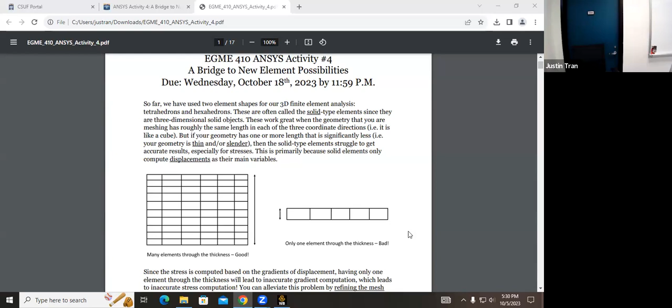The idea behind the activity today is to give us practice with shell and beam elements. In the last two lectures we've been talking about this special element type - shells and beams - and how they can help us out when our geometries are in a challenging position. Remember what we talked about is that, generally speaking, when you're making a mesh, you want to have multiple elements through the thickness.

So this is what's going to give us the best result. But if you have a thin, slender geometry, sometimes it's really hard to get that, and you end up with a mesh that looks like this. We have only a single layer of elements.

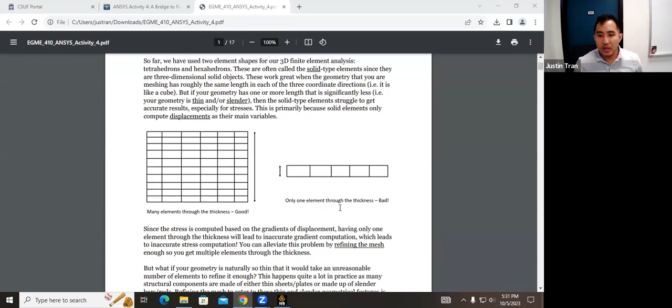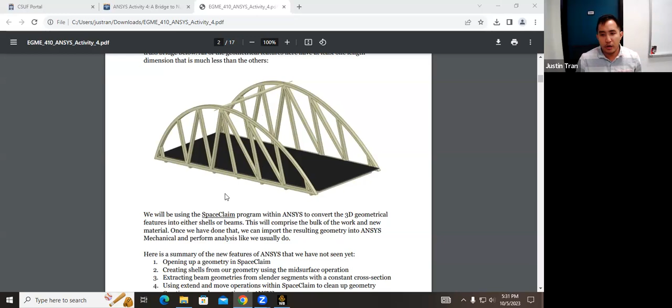Okay. And so the geometry that we're going to be working with today is a bridge. If you look at this bridge, there are a lot of thin and slender geometries. So if you look at both sides of the bridge, we can convert them to shells. Same thing with the road. And we have all the beams, so we have the beam up top here, and then it's a little bit hard to see, but we have beams on the bottom. We'll convert all of these to shells and beams, and then we're going to do our analysis.

Okay, so if you haven't already, go ahead and open up ANSYS Mechanical, or just ANSYS Workbench, and then download the CAD file from the website. There's only one CAD file this week, just the bridges one. So there's no extra activity at the end of this one, but we are going to spend probably the entire time today working.

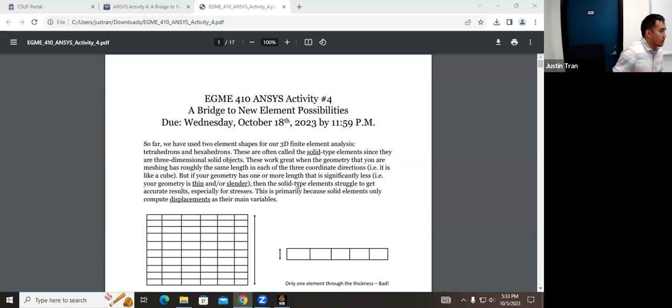All right, so just like before, let's go ahead and open up Static Structural, and let's import our geometry. We're not going to do anything with the material properties this time, so we're going to leave everything as structural steel. We're going to focus purely on the geometry. So let's go ahead and browse and import the geometry that I had on there. It should be bridges.iges.

And then we're going to open up this geometry in a program called SpaceClaim. If you're working with the 2023 version of ANSYS right now, you'll see that there's three different CAD softwares within ANSYS. I don't know why they have three, it used to only be two. I actually haven't had a chance to check out Discovery, which is their newest one. So we're going to do this activity in SpaceClaim, which was their newest one before Discovery.

Okay. So you're going to right click on geometry, and you're going to edit this geometry in SpaceClaim. Make sure you pick SpaceClaim. Don't pick Discovery, don't pick DesignModeler. All the instructions today are going to be relevant only in SpaceClaim. It'll take a couple minutes, so make sure you guys are starting that process.

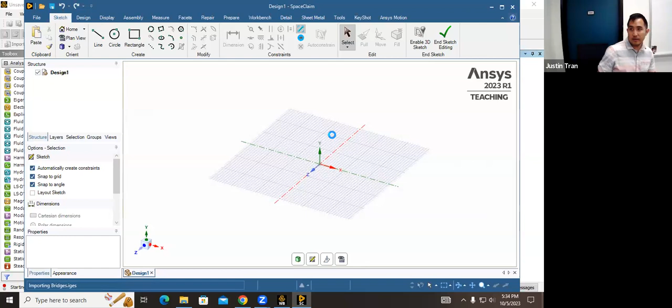It might take a minute or two, depending on the power of your computer, but once you load it into SpaceClaim, it should look like this. You should see the bridge, the beams, the road and everything. I'll give everyone an extra minute to load it up, because for the next few steps it's going to be really important that you watch what I'm doing and repeat it as closely as possible, because it's going to be a lot of steps. We're going to be going through different menus, clicking on other things, and once we convert something to a shell or beam, it's a little bit hard to go back. So I want to make sure that we're all staying on pace.

I'm going to move my bar down here. Okay. All right, so is everyone able to open the bridge CAD file in SpaceClaim? Anyone still loading up? Okay. All right. I'll give you guys 30 seconds.

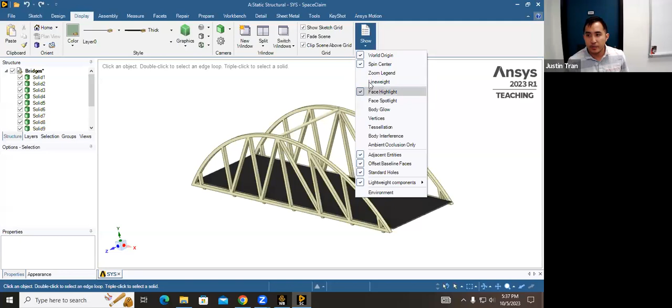Okay, so was everyone able to open up the bridge in SpaceClaim? Oh, good. Okay, so what we're going to do in SpaceClaim here is we're going to basically modify this geometry to become shells and beams. So we're going to do all that conversion in here, and then by the time we get into ANSYS Mechanical, we're just going to mesh it straight away.

All right, so the first thing we're going to do, and this is going to be a theme throughout most of today, is we need to fix the geometry, right? If you remember what I mentioned at the end of class on Tuesday, once you start converting your geometry to shells and beams, it creates a lot of gaps. It creates a lot of parts that don't connect as they used to once you convert things to shells. So we're going to spend the majority of our time here actually correcting those.

And so the first thing we're going to do is check for any gaps or inconsistencies right off the bat. You're going to come up to this top tab here and click on Repair. The Repair tab is there to repair the geometry. ANSYS has a lot of automatic tools here to automatically detect some problem areas in the geometry.

So the first thing we're going to do is go to this first tool here called Stitch. So we're going to click on Stitch. What the Stitch tool will do is, if there are two parts of the geometry that are not quite matching together, and they're 3D models, it'll stitch them together. There's nothing wrong with this model, so there's nothing to stitch. But I did want to make you aware of that, if you were going to use this.

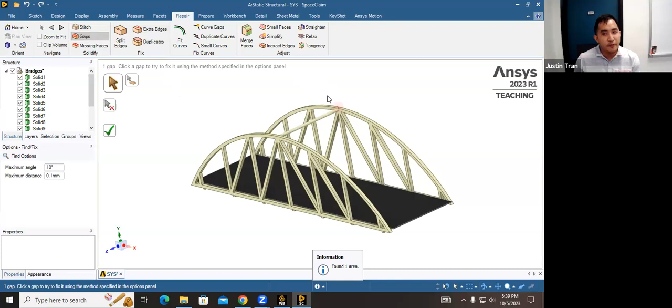Before you start converting anything to shells and beams, you should always try to stitch your model. If you click on Stitch, you should see at the bottom that there's a little bubble that comes up. The other tool that we're going to use here is called the Gaps tool. If you read the tooltip for Gaps, it says it's going to detect and fix any gaps in the surface. And you're going to see it did find one gap here, a small gap in between these parts.

But we're actually not going to fix it here. Normally, if you did have something that can be fixed in this model, either with the Stitch tool or the Gaps tool, this green check mark here will highlight, and you can click it, and that'll automatically fix the part. This one in particular is something different. We'll deal with this later, but that shows you an example of what ANSYS can do automatically. So you shouldn't be stitching anything, there are no gaps to fix here, but I'm just showing you what to do in general.

All right, so now that we're confident that our 3D model is at least good to go, let's start converting this. The next tab we're going to go to is the Prepare tab, the one right to the right of Repair. The first thing we're going to do is convert our thin segments into shells. We have three shell bodies here: the two sides of the bridge, and the road. So we're going to convert all of these into shells.

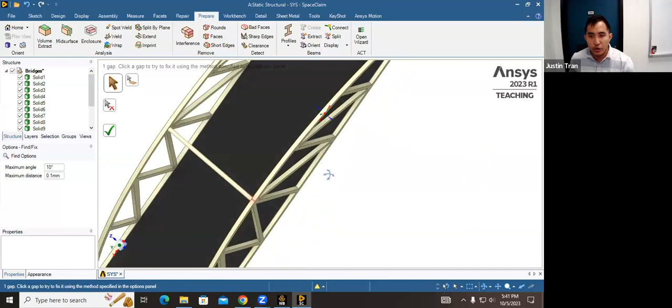If you look at the thickness, I think it's most clear from the road. You can see the road is very, very thin compared to how long and how wide it is, so that's a textbook example of a shell. The same can be said about the sides of the bridge. If you compare the length and height of the side of the bridge, they're much greater than its thickness. So these are perfect surfaces to convert to shells. The operation we're going to use is the Mid-Surface operation, which is what we talked about today. So let's go ahead and click on Mid-Surface here.

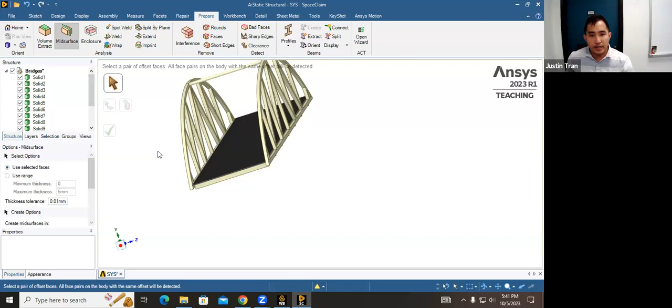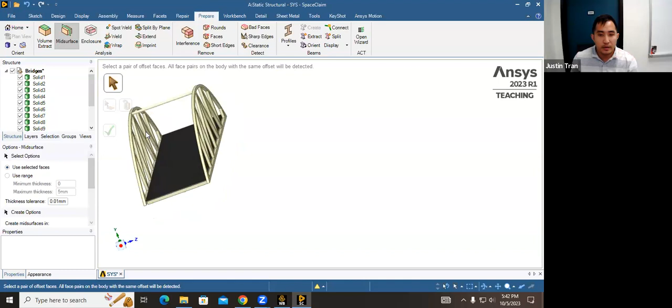Right. So the next step here is going to be to select two parallel surfaces. And so remember, the way the mid-surface works is that you pick two surfaces here that are parallel to each other. So I'm going to click maybe the inside of this bridge here, and the outside as well. And so the two sides of your bridge should highlight. So one should be green, and the other should be blue. Okay. And so that basically says that ANSYS has found two viable surfaces.

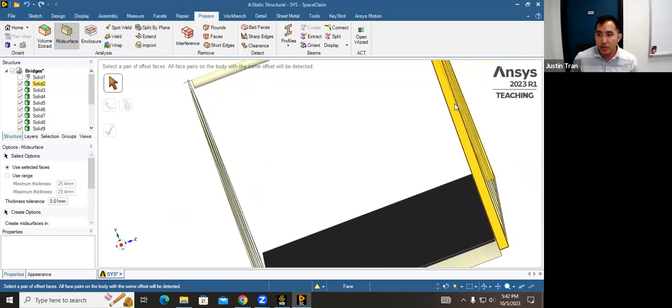Right? And so to create the mid surface, all you have to do is click on this green check mark. Okay. And so by doing so, it's going to create a mid surface in between the two. Right? And so I'm going to try to hold this on as much as possible. You can see highlighted or kind of transparent now is the old surface. And then the gray thing in the middle, that's the mid surface. And so if you click on it, you can see that we've basically turned this three-dimensional part of the structure into just a thin shell, which has infinitesimal thickness.

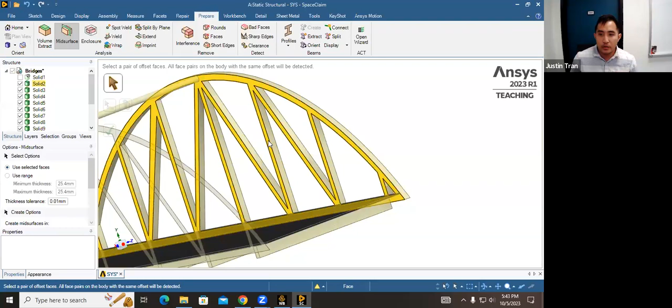All right, so let's go ahead and repeat that for the other side of the bridge. So make sure your mid surface tool is highlighted. So go ahead and click on the other side of the bridge. Once again, we have green on one side, blue on the other. Hit the green check mark. And so we've converted that side of the bridge to a shell.

And then finally, we're going to do the same for the road. So the road, we're going to click on the road, the bottom side of the road, click on the green check mark. For the road, it's a little bit hard to tell because the road was already so thin, but you can see from here that it did turn it into a shell. All right, so by the end of this, you should have 3 shell surfaces, so you should have 1 shell for each side of the bridge, and then 1 for the road. Okay.

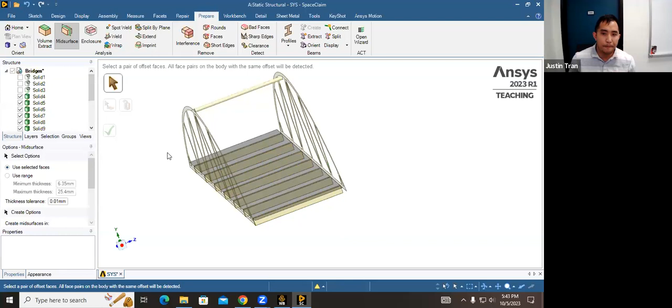All right, any questions on this? Everyone able to use the mid-surface operation, okay? Awesome, cool. All right, so that's mid-surfacing, and that's all there is to it. So your geometry has those parallel surfaces.

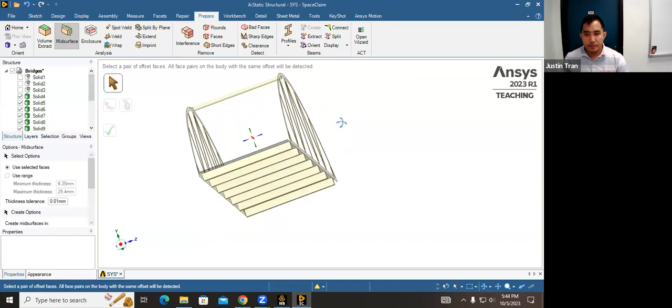All right, next we have the beams. Okay, and so if you look at each of these beams here, they're all fairly slender objects. So they all have one dimension, right? In this case, it would be the length of these beams, that's much greater than the height or the width of those beams. So these are perfect candidates for the beam element.

So same thing. To create a beam element, we're again going to be within the prepare tab here. And then the button that we're going to pick is on the right here called extract. Okay. And so if you hover over the extract button there, you can see the tooltip. And so you can see that it's going to extract a beam from a solid. As long as that solid has a constant cross section, then we can extract the beam. Let's go ahead and click on this tool.

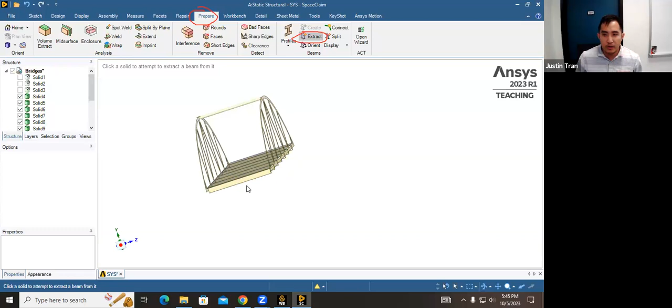Right. And after you click on the tool, you can then click on any of these beams here. Be careful, don't click the road. And so after you click on a beam, you can see that it disappears and it's replaced by a line. Let me go ahead and do that for all the other beams. Just going to go one by one, click on each beam. They should all be converted. Right, so pretty easy, right? And so we're good. So we have all shells and beams, right?

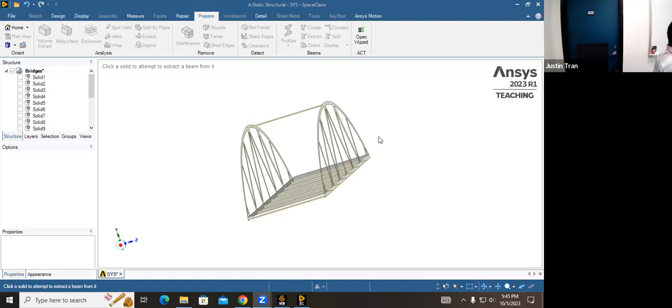And so I would love to say that's all there is to it, but there's more. But was everyone able to convert their geometry? So everyone has shells and beams now with geometry. Okay. All right, everyone on Zoom doing okay?

No, I feel like I kind of neglect the Zoom. You guys are doing okay.

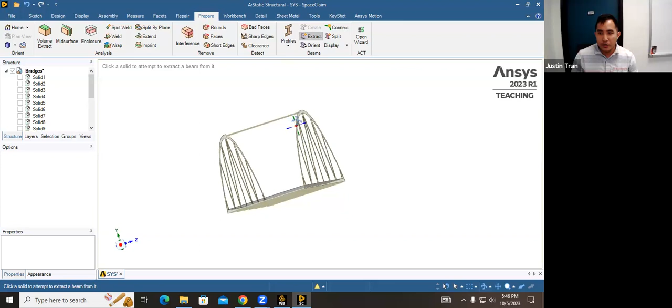All right, so now we have a geometry with all shells and beams. So the next step here is going to be to make sure that all the parts are connected. And so if you zoom in, let's zoom in on this top beam at first. You can see here we have an issue where this line right here, which we used to replace the top beam, there's a gap, right? There's a gap in between where the beam should end and the side of the bridge, right? So that beam isn't structurally attached to the side of the bridge.

So we need to basically repair this geometry in order for that to happen. Okay. And so the tool that we're going to use for this is an extend tool first. Because what we want to do is we basically want to extend these beams until they hit the bridge.

Question in the chat, sorry. Oh, doing good. All right.

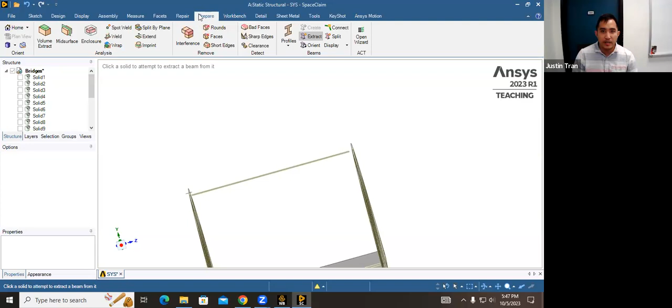Okay, and so the tool that we're going to use is also in this prepare tab here. We're going to use this button right here called extend. So if you highlight over the extend, you can see what it will do: it will extend surface edges or sketches to line up with the intersecting bodies. This is kind of the tool that ANSYS has developed to make sure that after you create shells and beams that everything connects. So let's go ahead and click on this.

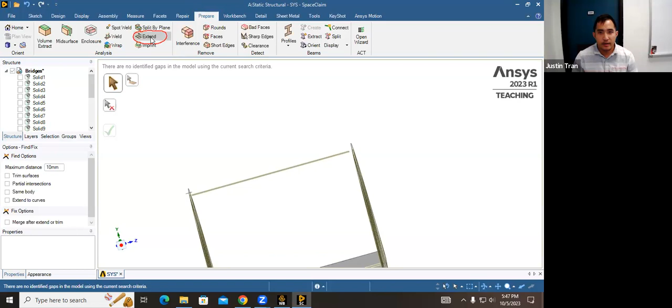At first, it's going to tell you that it's not going to see anything here. So go ahead and click on extend. It's going to say no areas were found, which is not true. And the reason it's not seeing any areas is because it's only checking for a maximum distance of 10 millimeters. So if you look on the options on the left, you can modify how far you want the extend to check. This bridge is bigger than 10 millimeters, so we need to increase this. Instead of 10 millimeters, let's change this to 50.

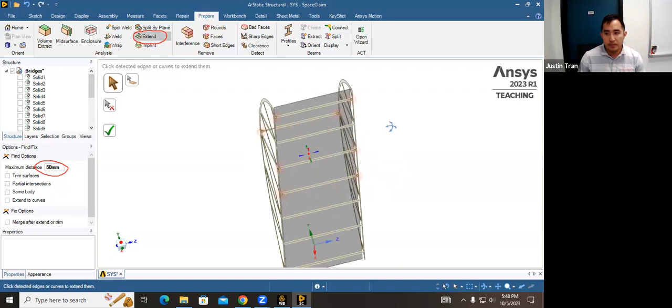Okay. You can see after we've changed that to 50 millimeters, ANSYS has found certain areas here that it can extend. It's highlighted all of those with the red circle there. So to fix it, you can go ahead and click the green check mark. Let me show you what happens when you do that. Here. You can see from here that there's a gap.

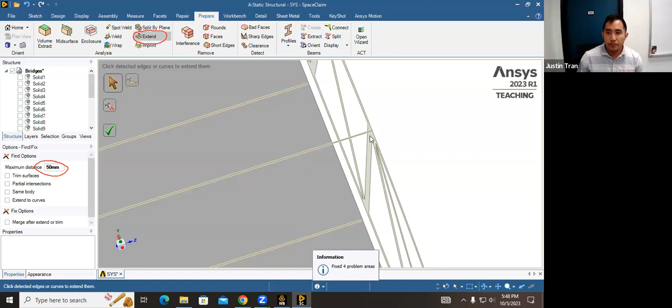After I hit the green check mark, the beam gets extended all the way to the bridge. And it only does that for one side, so you're going to have to hit the green check mark again. That extends for the other side as well. And that'll actually fix quite a few of the beams at the bottom too. But it doesn't fix all of them.

Any questions on this so far? Everyone's able to extend? So many areas where it's supposed to solve. It was supposed to solve for 8, so it should be 2 areas on the beam up top and 3 per beam at the bottom. Why do I got 6? Okay, it's okay. So not all the beams are going to connect, and the other ones we're going to have to modify. Might be a little bit different for everyone, just because of the 2023 version. It's not supposed to fix all the beams, so there should still be some beams that are disconnected. All right, any other questions on this so far?

Okay. So let me do this just to make it a little bit easier to see. Let me go ahead and remove the road. I'm just hiding the road for now. If you have this structures tab here on the left, you can click on this check just to hide it. We're going to bring it back, don't worry. This is just to make it a little bit easier for us. So let me do this.

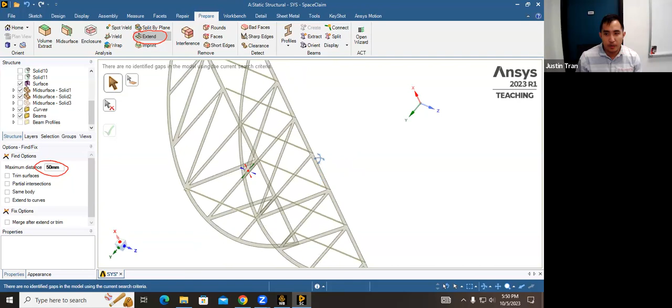Okay. So when viewed from the top here, this is our bridge. What I've done is I've clicked on the y-axis here to view it from the top. And I did this just so I can illustrate that not all the beams are connected. So we look at this beam on the bottom right here. This one was able to connect. But when we go to the next beam here, you can see that there's still a gap. And you might be thinking, why is that? Why isn't this beam connected to the bridge?

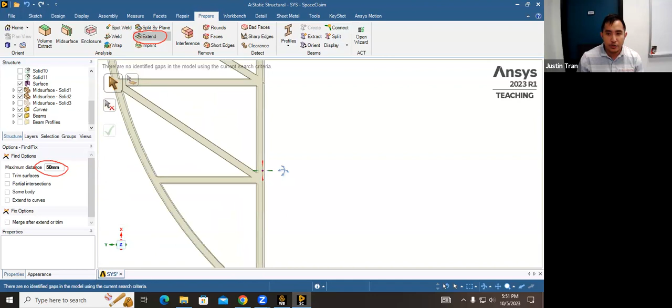Okay. And so what I've done is I've changed the view so that we're looking down the z-axis here. And I've zoomed in on this beam here that's connected. And you can see here that it's slightly offset. Okay, so let me rotate it around just so you can see. So what I'm looking at is this beam right here is the one that's not connected to the bridge that it should be. And when I rotate around, you can see that there is a small gap.

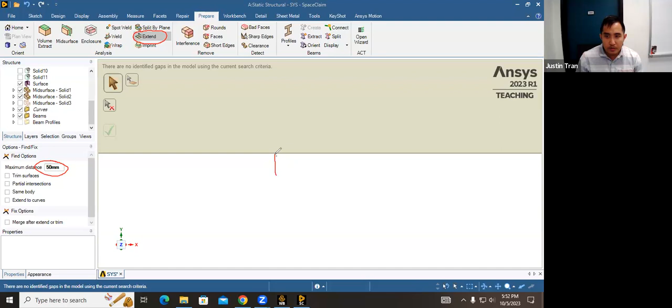Okay. And the reason for this is that when we converted this curve into a beam, the center of that beam actually wasn't fully aligned with the bridge. If we convert it to a beam, we can see that the beam is actually below the bridge. And so we need to fix this. So we basically need to move this beam upwards a little bit, just enough so that it intersects with the bottom of the bridge. And then we can use the extend tool to extend it to intersect.

Okay, and so to do that, this is going to take a few different steps. Because first of all, we need to know exactly how much we need to move up, and then we actually need to move it. Okay, and so to see how much we need to move the beam up, we're going to use this tool called measure. Go to the top of the screen, we click on the measure tool here. And you're going to click on measure right here. Okay, so you can see that the measure has an image of a caliper.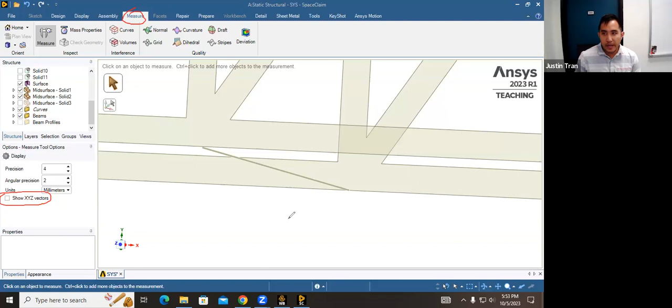All right, and so before we actually measure, you want to make sure that you select this option here for show XYZ vectors. Because we are basically going to be moving this beam up in the Y direction. You need to know how far off. So the way to use this measuring tool is we're going to use control click. So we're going to click on this beam. Right, so you click on the beam just by itself, it gives you the length of the beam.

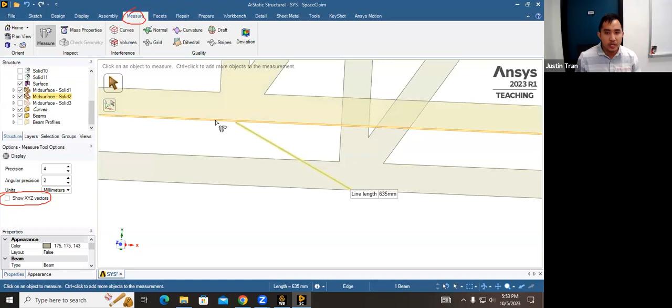Then you're going to hold control on your keyboard. Then you're going to click on the bottom edge of the bridge. You have to be careful here. Make sure you click the bottom edge. You don't want to click the surface. And so what you should see with the XYZ vectors is that, when you measure the beam relative to the bottom of the bridge, there is an offset of minus 0.4127 millimeters. So we're very, very close. We just need to move it up about 0.4

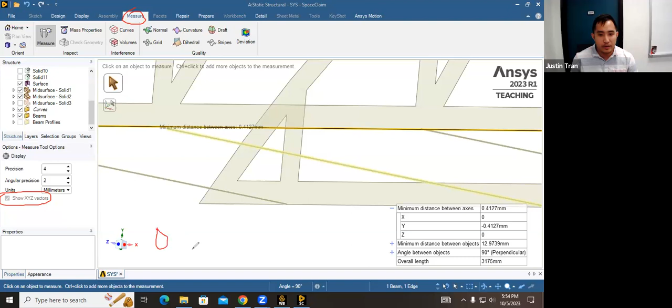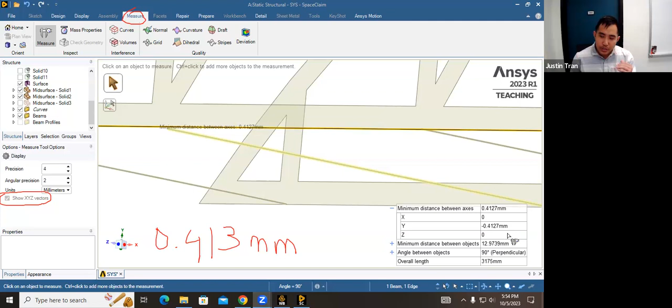413. Let me go ahead and write that down. And you don't have to use your screen. But I don't, and so I write it here. 413. And so now we know that this beam, we have to move it upwards 0.413. It just has to be slightly bigger than this gap. We just need to move it up just enough to intersect with the bridge.

Okay, so we're done with the measure tools. We don't need that. Let me go ahead and clear this. I cleared my thing. Okay, it's okay, I remember. And so the way that we're going to move the beam upwards, we're going to go to this next tab called Design. From the Design tab, we're going to be able to move different parts of the model around. And so the tool that we're going to use is this one right here.

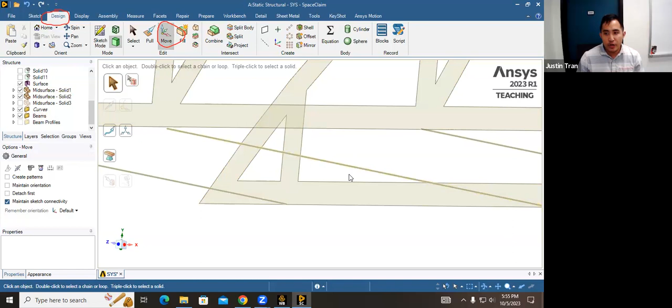All right, so go ahead and click on the Move tool. And after you click on the Move tool, you're going to click on the beam that you want to move up. We're going to go ahead and click that beam. And then after you click that beam, there should be a coordinate axis that shows up here. And so you want to drag it upwards. And so for me, it's going to be the blue arrow. For you, it might be a different color.

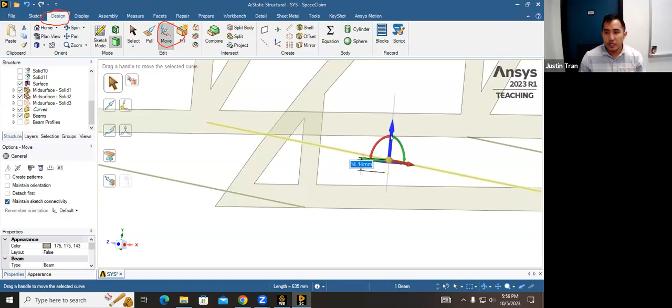Okay. So when I click on the blue arrow, I'm going to start moving it upwards. And you can see as I move it upwards, there's a box that shows up on the side that tells you how much you're going to move it up. And so the way to use this is you click and drag the arrow until the box shows up. And then once the box shows up, you can input the value.

Make sure you're moving up the whole beam. Don't click on the side of the beam, make sure you click on the entire body of the beam so the entire beam comes up.

And after you do that, the beam should now be properly aligned with the bottom of the bridge. Let's go back to the Prepare tab.

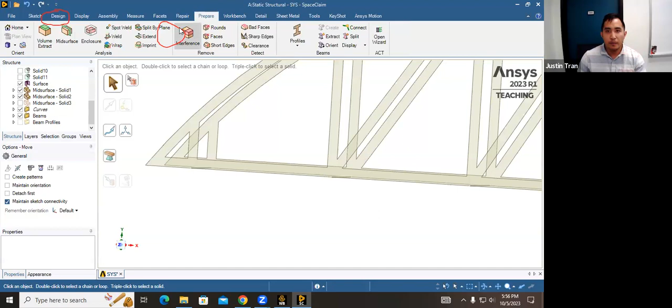We're going to click on the Extend tool. After you click on the Extend tool, you should see that the two ends of that beam we just moved should now be able to be extended into the bridge. So click on the green check mark. And now that beam is good to go.

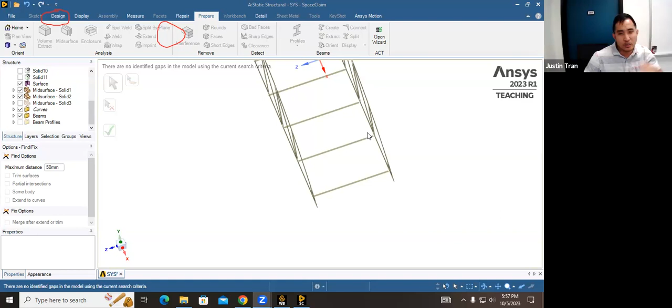I know people are having this question, but every beam that's off here is actually off by a different amount, so it kind of makes it a little bit obnoxious. You're going to have to do the measurement tool for every single beam, but I think it's good practice. So all the beams are slightly off by a different amount, and you're gonna have to measure each and every one, but it's okay.

I'll give you guys maybe 10-15 minutes to work on this, just because it is a little bit intensive. If you're having issues with it, let me know, and I'll come around.

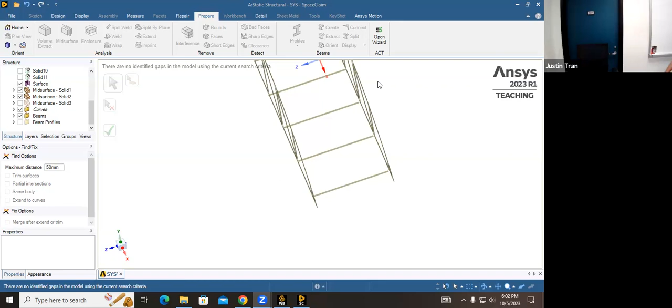So people, how are you guys doing? Doing okay?

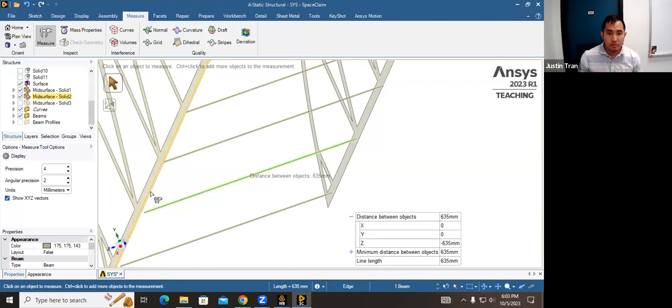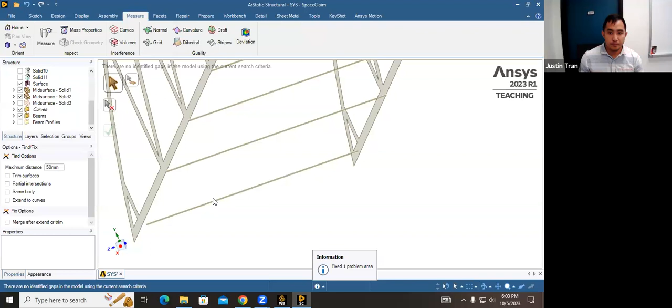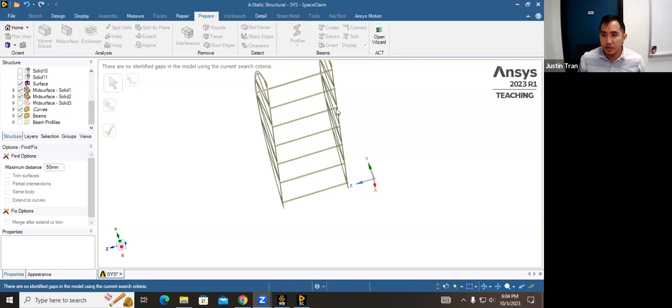Yes, you want to move the beam just slightly up, so that you're not making it touch the bottom. Go back to design. You don't want to move it up too much because we want to respect the original geometry.

You might have accidentally moved one side, so when you move, you want to make sure that you're selecting this. It could have been another step, you moved one.

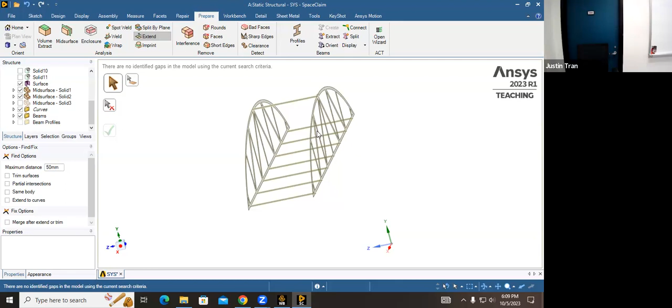I'll give you guys maybe another 10 minutes to work on this, but if you're done with the beams, let's do the same thing with the road. You can see the road here is kind of floating up a little bit, so let's move it downward so that it's sitting on top of the beams, okay? Just like we did with the beams, we're gonna measure where the road is relative to the bottom of the bridge.

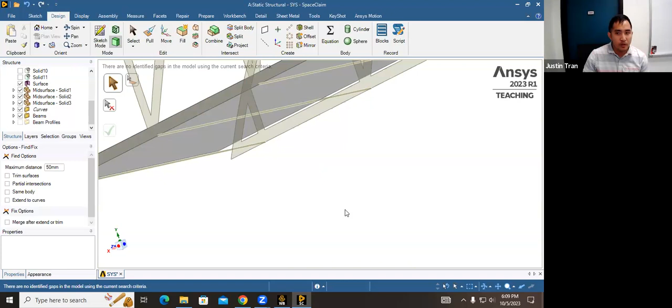One important thing people are experiencing right now: when you click on the move tool, you want to make sure you only select the body that you want to move. Some people are also selecting the bottom of the bridge, or maybe just clicking on one side of the beam, so you want to make sure you're selecting the whole object, and only the whole object that you want.

Okay, so I'm going to click on the road here. Let's go ahead and move it downwards, by 28.13 millimeters. And so it should be sitting right on top of the beams.

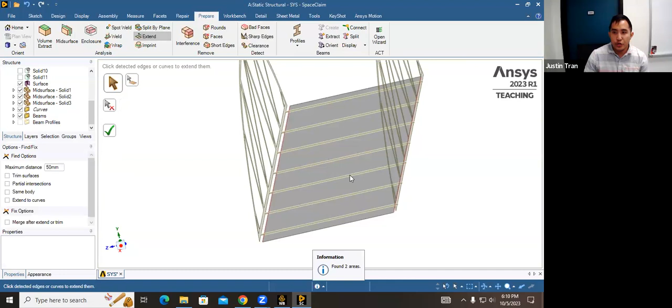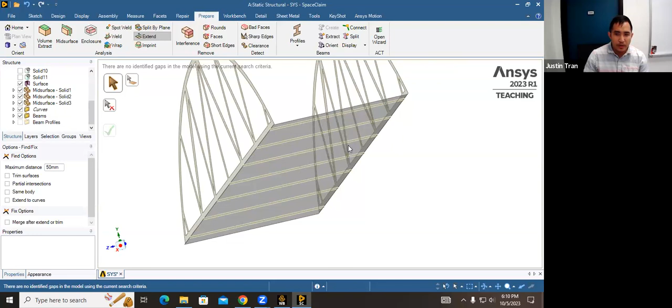Once we click on the extend tool, you should be able to extend the sides of the road as well. In the end, you should have a model like this: all the beams connecting to the bridge, and the road connected to the side of the bridge, sitting right on top of all the beams. You should have this by the time you leave SpaceClaim, but I'll give everyone about 10, 15 more minutes to do this part.

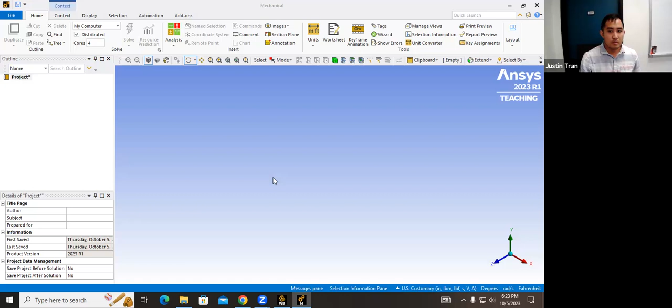Okay, all right, so after you load into mechanical, it should look like this. That's in shell and beam mode.

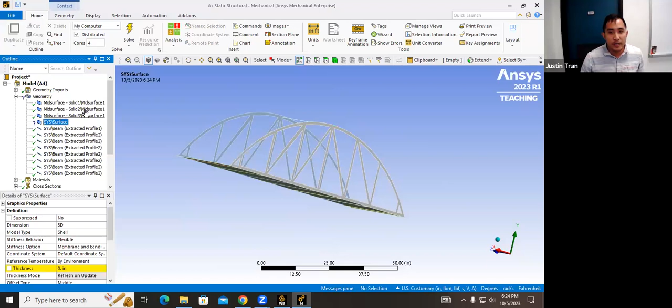Okay, so the first thing we're gonna do is we're gonna suppress this surface here. So if you remember from the beginning, ANSYS or SpaceClaim told us that there was one gap in the model. Here's the gap. For some reason, it's showing up as a separate part. So let's go ahead and just suppress this because it's not really doing that, and it should show up as like a question mark sys surface. So let's go ahead and right click and suppress it. Okay.

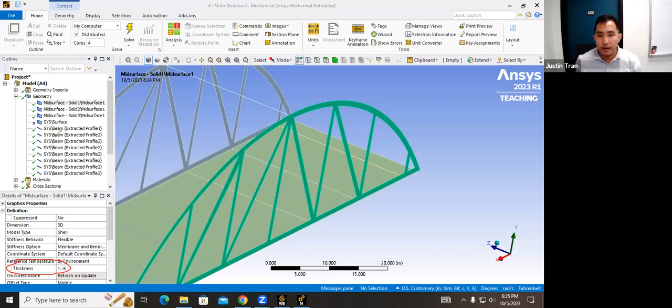And let me show you something. So remember what we talked about on Tuesday was that every shell here needs to have its own thickness, right? And the thickness is not represented geometrically, it's represented essentially as a material property. So if you click on one of the shell surfaces here, you should see in the bottom left of the screen, for the sides of the bridge, the thickness of that side was about 1 inch. So you should see that 1 inch there. And for the road itself, it should be about 1/4. So that's kind of the benefit of using the mid-surface operation, is that ANSYS kind of records that thickness automatically. But the cool thing is you actually have the freedom to change it later on if you wanted.

Okay, but that's not the annoying part. The annoying part is the connections, right? So what we have right now is a model of shells and beams, which is great. The problem is, because we basically destroyed the geometry and replaced it with a new one, ANSYS broke all the connections that it had before.

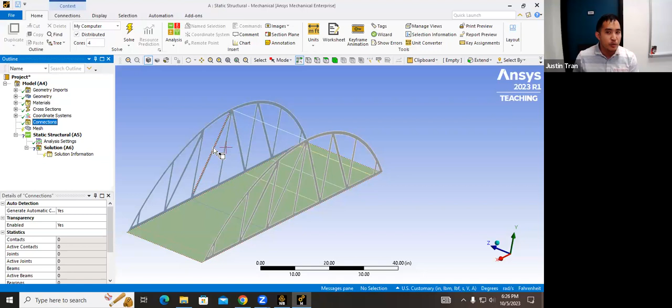But physically, what we think should happen is that the beam should be physically connected to the bridge, the road should be physically connected to the beams, and the road should be physically connected to the bridge as well. But we have to do this manually because we created all these shells and beams.

Okay, so you're going to go to the connection area here, right click on connections, go to insert, and insert a manual contact region. With that manual contact region, we're basically going to define which parts should be connected to each other so that they can be fixed together in the simulation.

Okay, so let's click on manual contact region. We have quite a few connections that we need to make here, but we're going to do them in groups to save us some time. The first contact region I'm going to make is to make sure that this side of the bridge is connected to all of the beams. So I'm going to click on the bridge here so that the side of the bridge highlights green, and I'm going to set that as the target. Your target should have one face there.

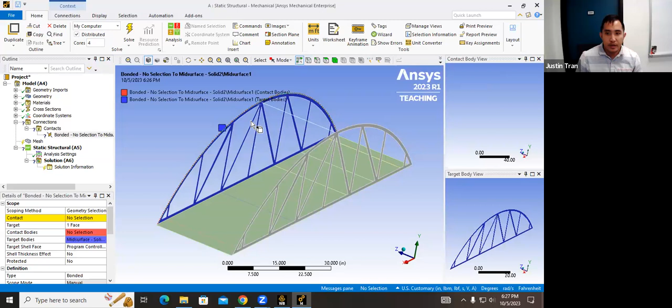And then for the contact, those are going to be the parts that are going to be attached. The parts that we want to attach to the bridge are all the ends of these beams right now, so we're going to click on each individual node. This is going to be a little bit annoying. To make sure that you can select all the ends of the beams individually, you want to change the selection mode to vertex.

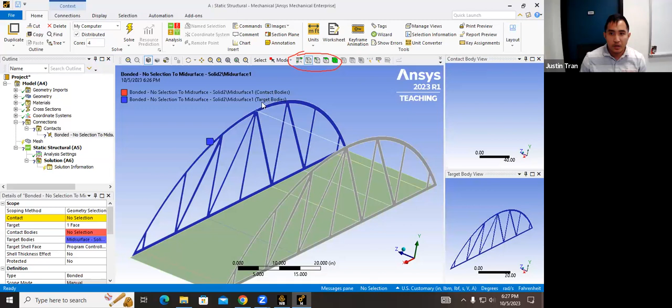You're going to go to this bar on ANSYS right here. We've utilized this bar a couple times in past activities, but I think here is going to be the most useful. We want to make sure that our mouse snaps to a vertex. With the vertex mode selected, let's go ahead and click on all the sides of the beams. Make sure you hold Control on your keyboard so you can select multiple things at once.

You want to be careful here. You want to make sure you select all the beam ends. Before you apply it, you want to be careful, because there's a lot of corners on these sides of the bridge. You want to make sure you don't get the corner; you want to make sure you get the ends of the beam.

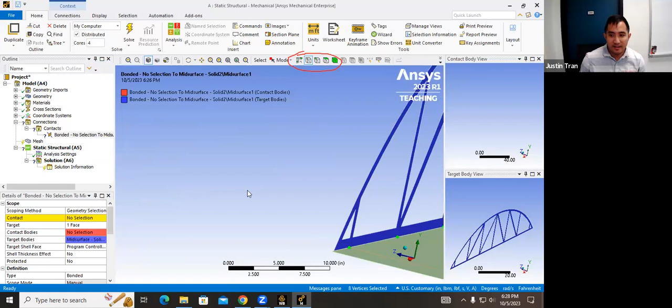And so it should look like this. You should have 8 little green dots showing up. Once you have those eight dots showing up, go ahead and go to the contact here and hit apply. What you should see is that those 8 vertices should be connected to the one side. We have to make all these connections manually, so that's one connection that we need.

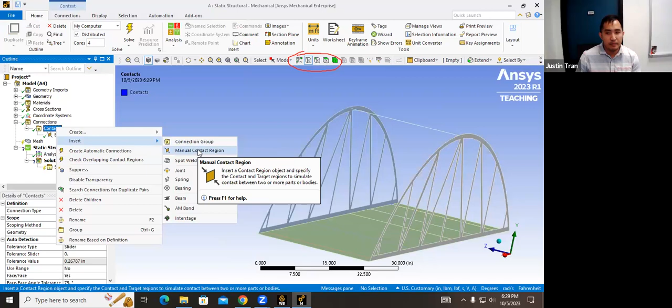To add another contact region, you're going to right click on contact, go to insert, and click on manual contact region again. You can do the same thing on the other side of the bridge. Click on surface selection, click on that side of the bridge, target, apply, click on vertices, and then you want to connect all the vertices to the other side of the bridge.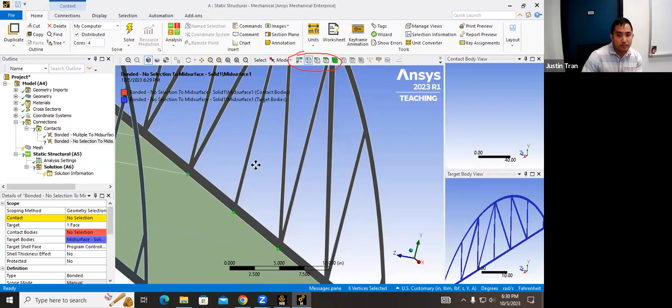You have to zoom in and fly around the model. It's a little bit annoying. So the bridge should be the face, and then for the beams, it should be the point. This step is necessary to make sure that the beams are properly fixed to the bridge. Otherwise, they're just going to slide past each other. Okay, so that's it for that one.

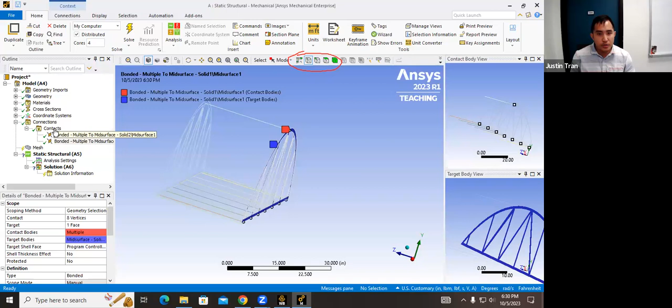You should have 5 contact regions overall. We just did the beams to the bridge. You want to create another manual contact region that connects the side of the road to the bridge, and make use of the selection tool to make it easier to select the parts that you want.

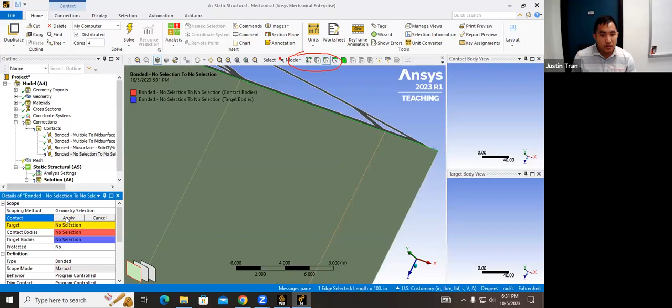I'll go ahead and apply all 5 contact regions just so that you can see, and then I'll give you guys some time. We are running out of time, so I want to make sure that the last contact region is connecting the road.

Go ahead. Yeah, yes. For the third and fourth one, was it the target, the road, and then the contact for the sides, or the other way around? Yes. Yeah, so your target should always be the bigger surface, whichever it is, and then the contact should be the smaller one, either the point.

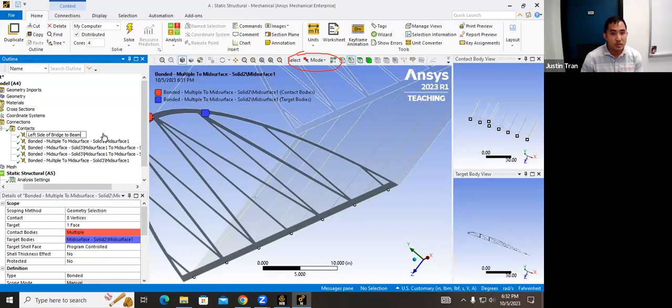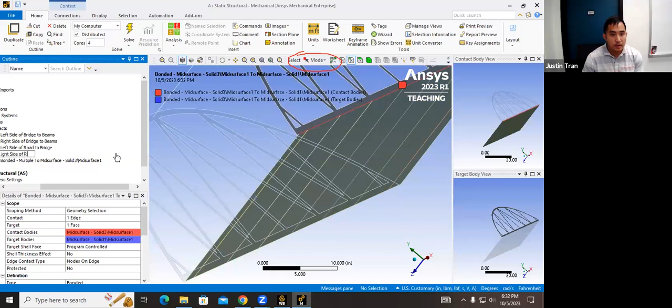Okay, so let me go ahead and label these, and then I'll go around and kind of help. Okay, so these are the 5 regions. So clicking on the different parts can be a little bit annoying, but make sure you have these 5 regions here, and I'll go around and kind of help people. Maybe for the next 10 minutes, we'll go very quickly over the mesh and the boundary condition.

What's up? Okay, it doesn't matter. Exactly, right. They click on one side. It doesn't matter as long as it gets it. Exactly. So I don't know why it only shows up green on one side. It shows green on another. Maybe it's because it is a shell surface, so technically it's 2 surfaces. Yeah, exactly. What's up?

Oh, that's fine. Yeah, so that's only just for more complicated models. Yeah, but for mine, I just put it all in one. It's just a sorting menu. So as long as you have the 5 regions. Yeah.

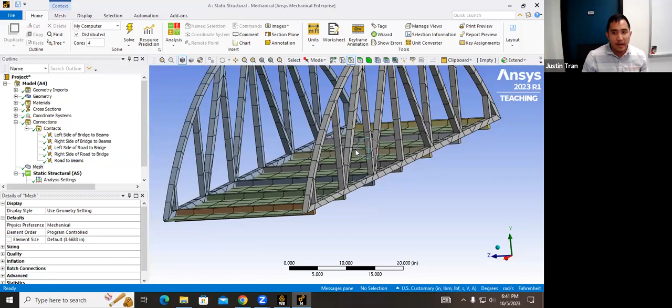Okay, so when you mesh here, I'm going to say this, but I know I'm going to get some emails back. If you mesh it here, it looks like we're using solid elements, but that's only a rendering thing. So if you go to display and unclick thick shells and beams, you should be able to see the mesh as it should be, as two-dimensional elements and one-dimensional. You guys can feel free to play with the mesh, but in the interest of time, I'm just going to leave the mesh as default.

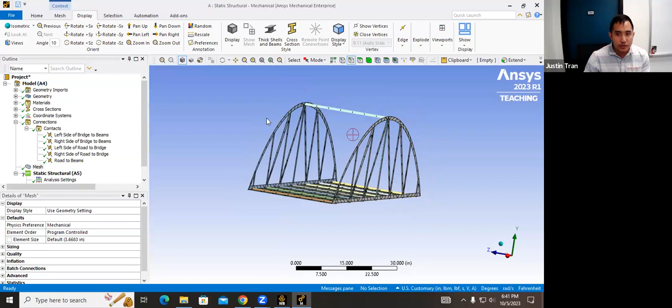And then to run the simulation, we need to have a fixed support somewhere. So I'm going to apply fixed supports on the two ends of the roads. Then I'm going to apply a load on top. Force load, apply to the surface. Let's say that we're going to apply 150 pounds in the minus y direction. Okay. So let me just really quickly show you the deformation.

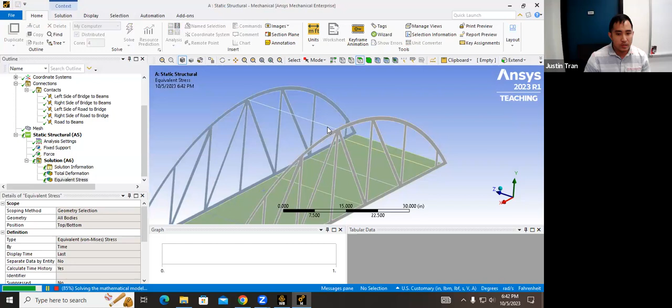All right, I know I'm going really fast, but I want to make sure that you guys see this. Okay. So the deformation should look something like this. If you did everything correctly, and you did all the connections correctly, you should have peaks of deformation in the middles of the roads, but the beams should be supporting it in between the two.

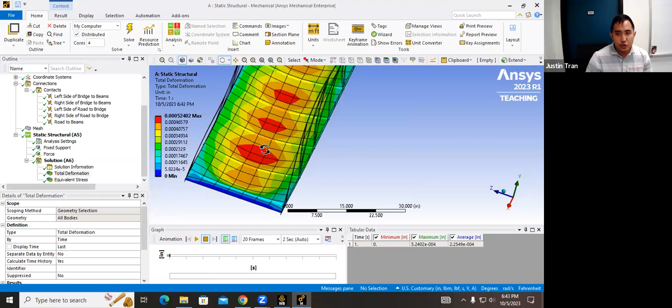Right? So you should see that where the beams are, the deformation is less because you have the beam supporting it. But away from the beams, you should have more deformation. So you should see almost these circular patterns on it. That should be the first thing that you check for. If you're not seeing this deformation pattern when you apply a simple vertical load on top of the road, I would go back and check your connections to make sure that they're all correct.

Okay, so we have a couple more minutes, and I'm going to go around and finish up some last minute questions, but that's basically the activity. For the rest of the activity, you're going to answer the rest of the questions, but they're all based on this. So we did hopefully the majority of the work today. All right, I'll come around a couple more times, but if you guys are finished or reach this point, that's about it.

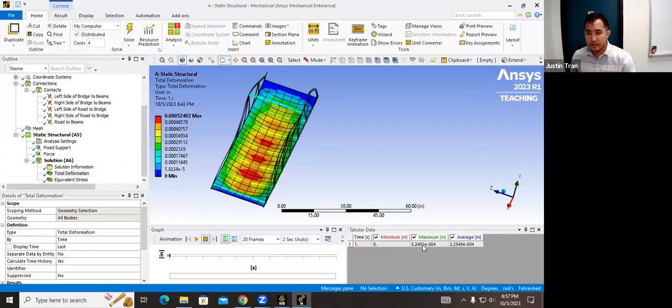Any final questions? Is the instructor here? No, you'll be here for a few more minutes. Okay, all right.